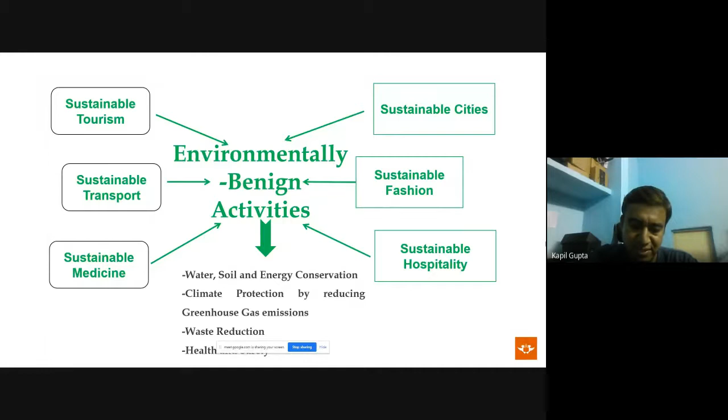It is very important to have a very brief discussion on United Nations Sustainable Development Goals, because these days all United Nations members, out of around 190 members, are aggressively working on SDGs. Universities and institutes are also working on SDGs. In our university, we are committed to focus our teaching and research towards SDGs as well as Industry 4.0.

So there are 17 SDGs. In the 2015 General Assembly of the United Nations, 17 SDGs and 169 targets were discussed and then finalized to promote economic prosperity, social inclusion, and environmental sustainability. Why? To get a better world by 2030. So what are those SDGs? There are 17 SDGs.

So out of these 17, being a teacher, being an engineer, and working in a technical university or institute, what SDGs can we focus upon? These are very clear. SDG number 7, SDG number 9, that is industry, innovation, and infrastructure, which I'm going to discuss briefly. And then obviously SDG 12, responsible consumption and production. SDG 11, sustainable cities and communities, is very important from the point of view of civil engineering and electrical engineering. Other SDGs can also be focused upon, but SDG 17 is also very, very important.

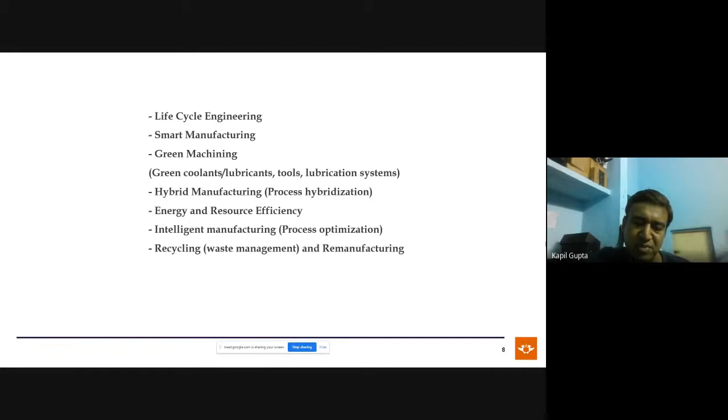So developments in sustainable manufacturing, when we speak about the very basic three conventional machining processes, turning, milling, and drilling. There are lots of sustainability interventions, like dry machining, near dry machining, green lubricants, process optimization, assisted and hybrid machining, using textured and treated tools. So they are ultimately doing what? These sustainable machining strategies are ultimately contributing to attain the key drivers in order to strengthen the pillars of sustainability. And the ultimate goal is to reduce the carbon footprint of machining, as well as to achieve cost efficiency and better health of the workers who are involved there.

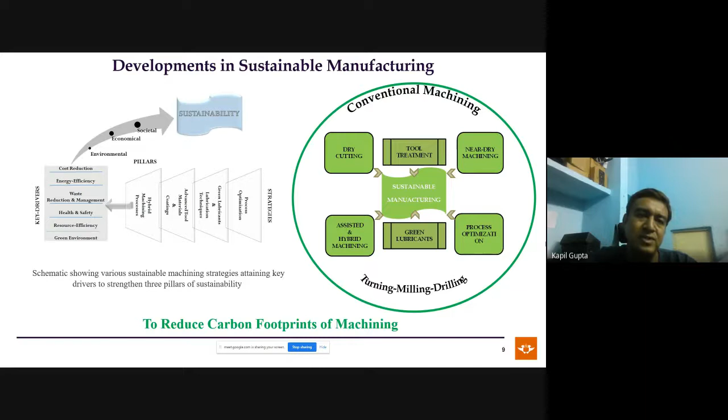So quickly, when we talk about the sustainability interventions in conventional machining, the MQL system is there, minimum quantity lubrication, where micro droplets of green or sustainable lubricants are sprinkled in the machining zone between the tool and work interface, and it makes a cushion-like arrangement there on the tool, and it increases the tool life as well as reduces the heat that is generated in the machining zone.

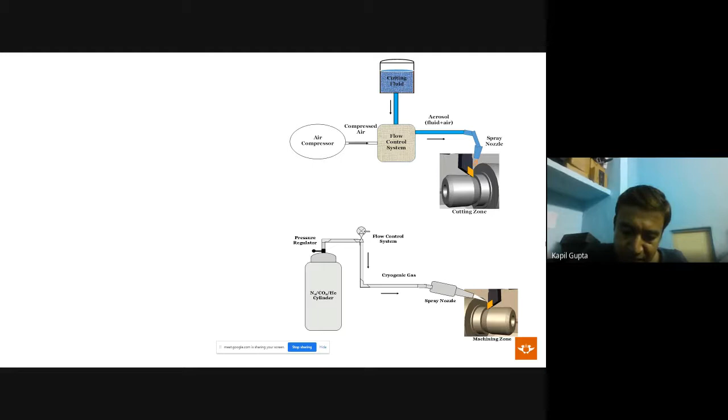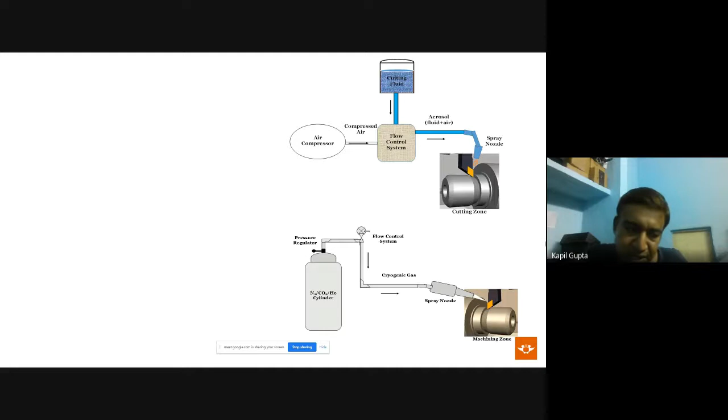The other example is the cryogenic cooling system, liquid nitrogen or some other gases like helium and carbon dioxide are sprinkled in the machining zone. A cushion-like arrangement is made there. It is very, very important from the point of view of minimizing the tool wear, and high-speed machining of difficult to machine materials is possible due to this.

And there are many other sustainability techniques, like two more: heat-assisted machining. We are talking about conventional machining, and you know very well conventional machining can also be used for meso and micro machining. So heat-assisted machining is there in order to soften the workpiece. If we struggle with the yield strength of the material, then just soften the workpiece. That may facilitate the machining, and we can easily machine difficult to machine materials at high speed due to heat-assisted machining.

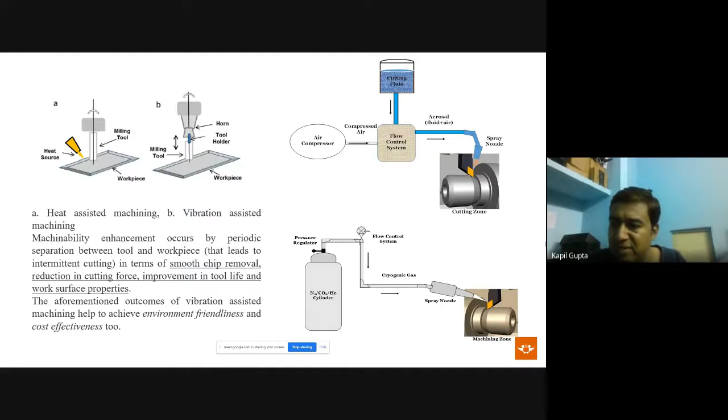Vibration-assisted machining is also there, where ultrasonic vibrations are provided either to the tool or to the workpiece to facilitate the chip removal, and ultimately they contribute towards environmental friendliness and cost effectiveness as well. So this is about the conventional. Conventional can also be used for macro, micro, and meso.

Now let's talk about the modern micro machining processes. We know very well laser beam machining, electrochemical machining, abrasive water jet machining, and electric discharge machining are the basic four micro machining processes. They are also used to cut macro products as well as meso size products.

We know very well why sustainable interventions are required, because there are lots of byproducts like harmful gases in EDM, ECM, and laser beam based machining. Silica dust is the major unsustainable byproduct in abrasive water jet machining. Exhausted slurry is also a byproduct. Radiation dangers are there in laser beam machining and electric discharge machining, and other byproducts like benzene, vapors and fumes. Those individual problems we'll discuss individually on the respective slides.

So to address this, there are various sustainability interventions like dry EDM, near dry EDM, green EDM; in laser, eco laser beam machining, underwater laser beam machining; in electrochemical machining, green ECM, pulse ECM; and ice jet machining for abrasive water jet. We'll discuss them individually. So these are the sustainability interventions in modern micro machining. Why? You know very well why. We have discussed why.

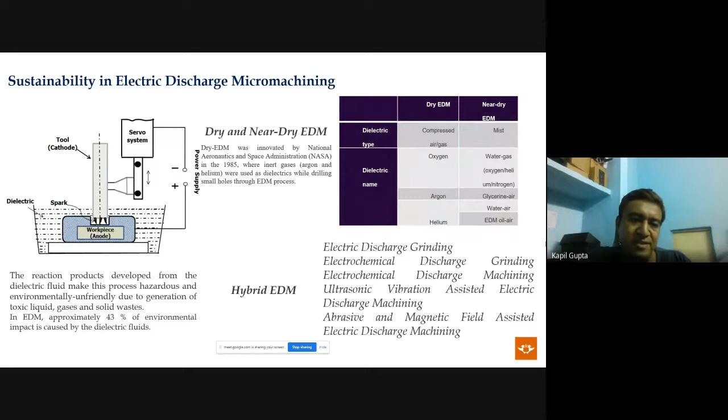When we talk about electrochemical machining, hydrochloric acid, sulfuric acid, these types of electrolytes are very toxic and harmful. So the alternative is to use green electrolytes in green electrochemical machining, like sodium nitrate, sodium citrate, citric acid, mineral water. They are less harmful compared to the conventional electrolytes used in electrochemical machining. Or pulse ECM is also very important, where a relaxation period is given during off time for flushing of the removed material, and that improves the productivity, improves the process capability, and ultimately you achieve sustainability.

The hybrid ECM option is also there, where electrochemical machining is hybridized with other conventional and advanced machining processes, for a better material removal rate, to improve the efficiency of the process, and ultimately to make electrochemical machining a sustainable process.

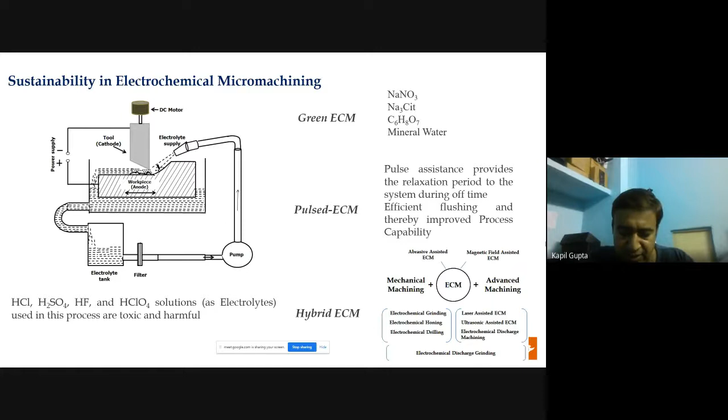Now, when we talk about abrasive water jet micro machining, recycling of abrasive is very important, and it has the capability to machine at the micro level or micro scale. Sometimes it is difficult due to the embedment of abrasive particles. It is sometimes difficult to use abrasive water jet machining for precision applications, for finishing operations, and especially for cutting food and these types of things. So the solution is using ice particles, which is called ice jet machining. Liquid nitrogen based ice particles are generated and supplied to the machining zone or cutting zone with high pressure water. So it is clean, safe, efficient, and environmentally friendly.

And there has been a lot of research conducted on sustainable EDM and sustainable ECM as well. There are research papers I haven't included here, so the work of the researchers is there. I also worked on sustainable gear manufacturing by abrasive water jet machining, which is a sort of meso machining. So it is very easy. When you explore some papers, you will find some equations on how to derive a sustainability index. Then you can compare various processes from the point of view of sustainability and determine which process is the most sustainable from the point of view of expenditure, energy consumption, and many other sustainability indicators.

So decontamination of electronic boards, cleaning of compact discs, printed circuit boards, camera parts is done using ice jet machining. Pollution-free and damage-free cleaning of delicate parts, damage-less cleaning of molds and toolings, and contamination-free cutting of food products like meat and all, ice jet machining is used. Researchers also used it, and they have shown very promising results after using ice jet machining.

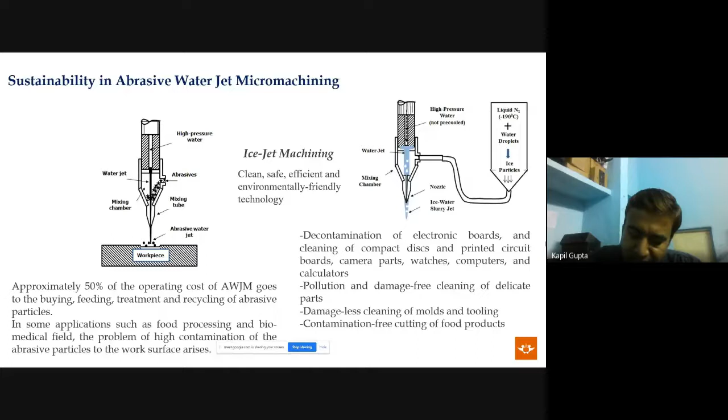Although ice jet machining cannot 100% substitute that, but to some extent. And research and innovation interventions are still required to make this process more sustainable.

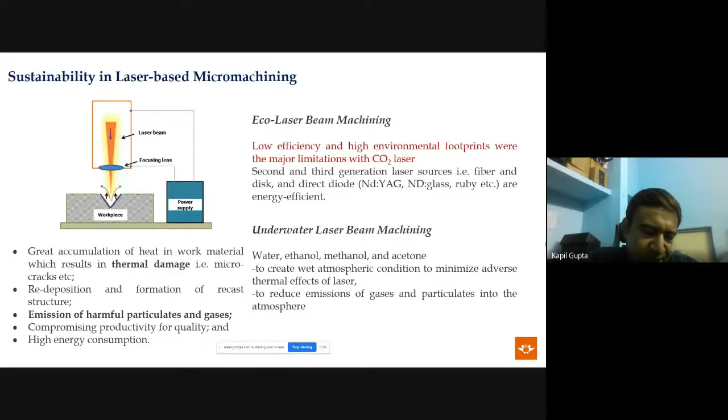When we talk about laser-based micro machining, thermal damage is a problem in laser, and emission of byproducts, aerosols, particulates and gases. So particulates and gases, that is all aerosol, it is a major problem. And the conventional CO2-based laser is very expensive from the point of view of energy consumption. So the substitute is to use direct diode, disc, and fiber lasers.

Underwater laser is also a very important sustainable variant of laser beam machining, where underwater or using some ethanol, methanol, and acetone, by various underwater laser beam machining techniques like static water, dynamic water, and water jet assisted machining technique, micro machining is done. It is to create a wet atmospheric condition to minimize adverse thermal effects of laser and to reduce the emissions of gases and particulates into the atmosphere.

As I said, there are 3 variants of underwater laser. They all are very effective, and there are various results of researchers for micro machining of ceramics and composites with this laser. So you can also explore in detail. I have just given an idea here of how it can be done and how it is being done these days.

So, future research avenues where we can probably make a collaboration for sustainability in micro machining. The collaboration depends upon the availability of resources at your institute, my institute. So what still can be researched under the segment of electric discharge micro machining? Investigating some more sustainable dielectrics and treatment of erosion slurry, that is a bit untouched, using a combination of sustainable dielectric and hybrid EDM. That is also one of my ideas.

Electrochemical micro machining: prevention of rust, sludge treatment, improved filtration, protection from electrolytes and harmful byproducts. It is very, very important. And investigating hybrid ECM with green electrolyte. That is also a very, very novel aspect.

In abrasive water jet micro machining, the treatment and recycling of abrasive particles has always been a major topic of research. Developing a suitable dust and particle collection system is also very important, and many novel attempts can be made in that area. In laser beam micro machining, treating gases, aerosols and particulates generated during material heating and evaporation, and protection from direct, reflected and scattered radiation, is also very, very important.

Hybrid laser beam machining: laser is being used with EDM and ECM for hybridization, and some more laser beam machining based hybrid techniques can be explored. Life cycle engineering, as I told you, for comparative analysis of which machining method is the most sustainable, life cycle engineering and analysis can be thought of.

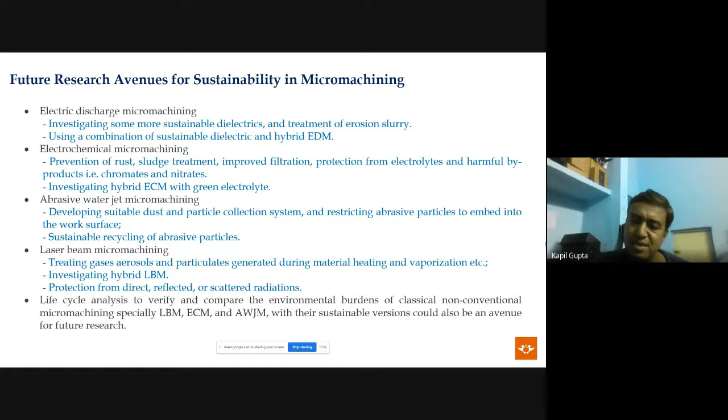Then I wanted to give you some facts and figures about sustainable development in India. Adoption of the United Nations 2030 Sustainable Development Goals roadmap, and who is taking care of it in India is the NITI Aayog. There are lots of schemes of the Indian government: Swachh Bharat Abhiyan, smart cities, Make in India, and from the point of view of sustainability and Industry 4.0 intervention, Startup India and Digital India schemes.

When we talk about statistics, 52% of the Indian population is aged between 15 and 35 years. So the PMO thinks wonders can be done in India, because most of the population is young, and it is the 6th biggest world economy. GDP is expected to be $4 trillion USD by 2030, and manufacturing contribution to GDP is 13% as per 2020. Now, there is the SDG index of NITI Aayog, where NITI Aayog rates various states.

So the topmost state for 2021 is Kerala, and they have their measures of how to rate and in what aspect of SDG, and they evaluate the progress. There are various other things, like a dynamic recycling industry being established in India. The International Solar Alliance is there in partnership with France, and lots of other schemes which I couldn't cover here.

But the value that embraces all our efforts, all our vision for the future, and all our commitment to our students, society, and continent is our ethical foundation. It is through this value that we treasure academic freedom and seek balance in our pursuit of knowledge. It gives us the strength to face our challenges with courage, to earn trust in others, to act responsibly, fairly, consistently, and transparently, to participate in our community, to practice that quintessential South African quality of Ubuntu, the humanness that makes us what we are and enables us to create what we know we can be.

As we teach, wonder, question everything, learn willingly, and bring the fruits of our research to the edge of a new future, providing all those who undertake this journey of knowledge with us with the tools we need to create tomorrow. The University of Johannesburg, the future reimagined.

So lastly, I would like to conclude, sustainability is a journey, not a destination, as far as I am concerned. And our goal should be to improve continuously. And my call to action is: start thinking about sustainability if you haven't as yet. And let's collaborate to become sustainable.